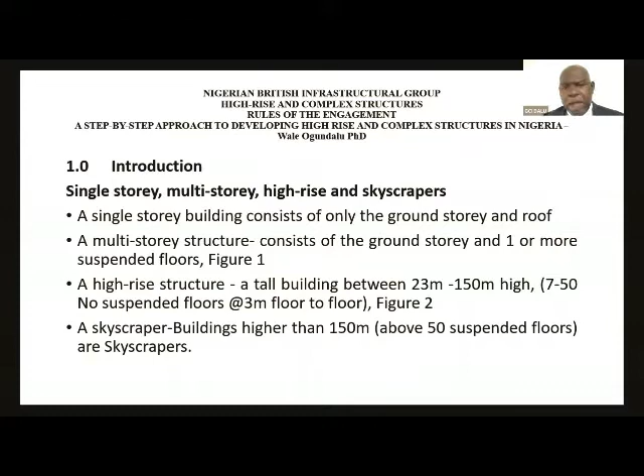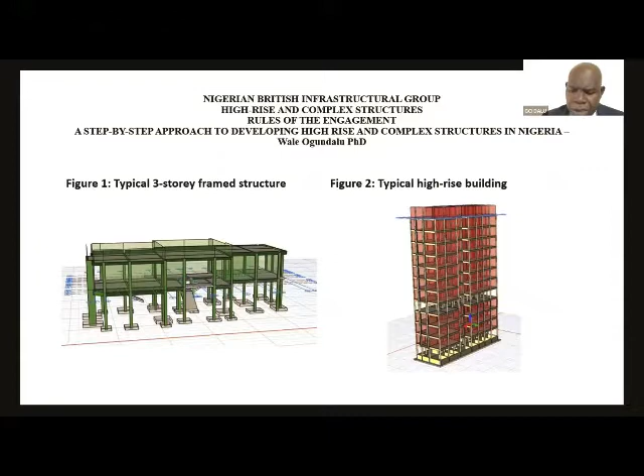A single-story building consists of only the ground floor and the roof. A multi-story structure consists of the ground story and one or more suspended floors. A high-rise structure is a tall building between 23 meters to 150 meters high, usually about 7 to 50 floors, while a skyscraper is a building 150 meters high and above. These are the basic figures for a multi-story building, a high-rise structure, and a skyscraper.

The design of a single-story building and that of a multi-story building, high-rise, and skyscraper follow the same principle. And that basic principle is to get all loads to the foundation, onto the soil, for the soil to take care of it.

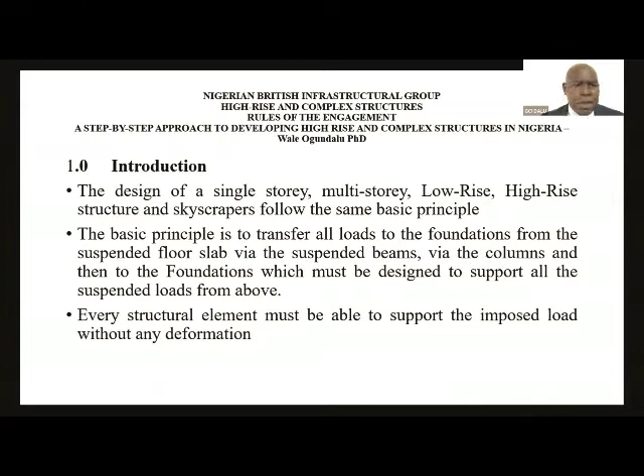A step-by-step property development process: Step 1 is the pre-purchase stage, whereby the developer sources for funds, looks for land, and gets the land. Step 2 is the contract negotiation and land acquisition. At this time, the developer buys the land, either taking it on lease or as an outright purchase.

Step 3 is the town planning and development approval process. Usually this is not followed in Nigeria, but in the UK, you go to the council, get the permit, and then go back and do your drawings.

Step 4 is the working drawing and documentation. Here, you enlist an architect who does the drawings, and you enlist services engineers and other professionals who also do drawings. Step 5 is the tender period, in which you enlist a project manager or quantity surveyor who does the quantities for you, prepares the bill of quantities, and then you invite contractors to make the building.

Then comes the approval stage. Step 6 is the construction, whereby you hand over the site to the contractor, and he does the construction. Step 7 is when the contractor finishes his job and hands over the keys to you. Then you, the developer, decide whether you want to sell or make a quick profit.

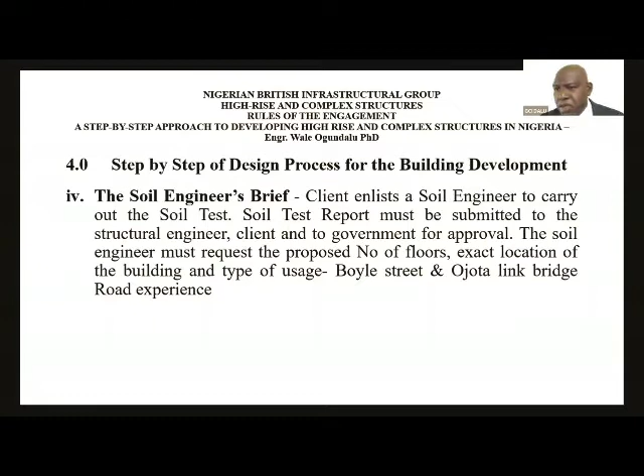The main things to look at in the soil test report are the allowable bearing pressure and the soil profile. Then the structural engineer completes his design, including the foundation and the superstructure, and hands over the drawings to the developer, who will now go ahead and process the approval.

Similarly, the developer also engages all the service engineers—M&E, fire, and others—and they do all their drawings. It is better to verify professionals' licensure before commissioning them. This is to eliminate the use of quacks.

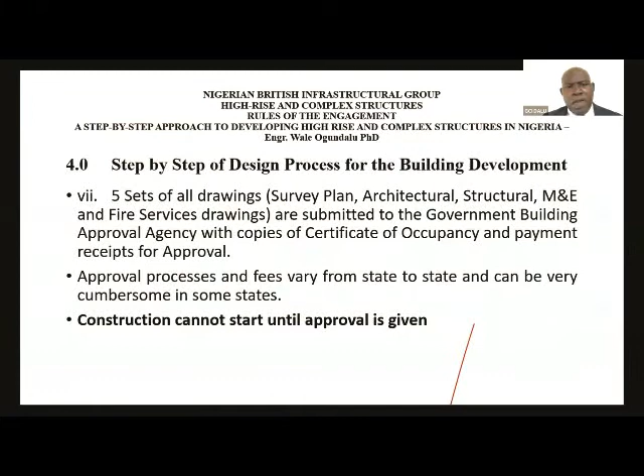5 sets of drawings are required for town planning approval and processing. While doing this, the client can enlist a quantity surveyor who does the bill of quantities. Based on the client's advice, you decide on an open bid or closed bid. Open bid: you advertise and contractors tender. Closed bid: you find about 7 people you've worked with before, invite them to submit bids, then select the best and proceed with appointment of the contractor.

The consultants are required from the start of construction to the end of construction. You jeopardize your investment and property when you refuse to engage professionals in site supervision.

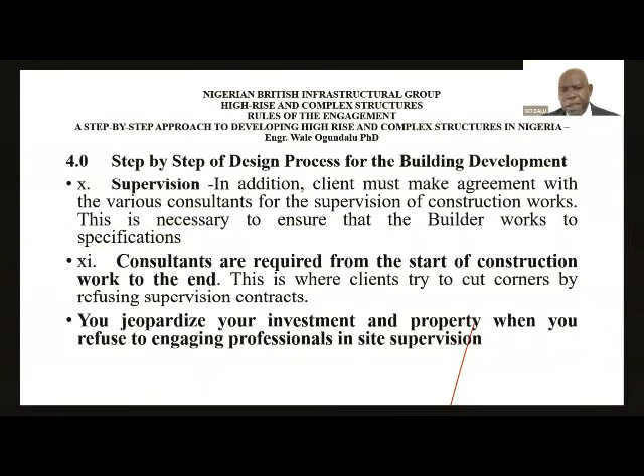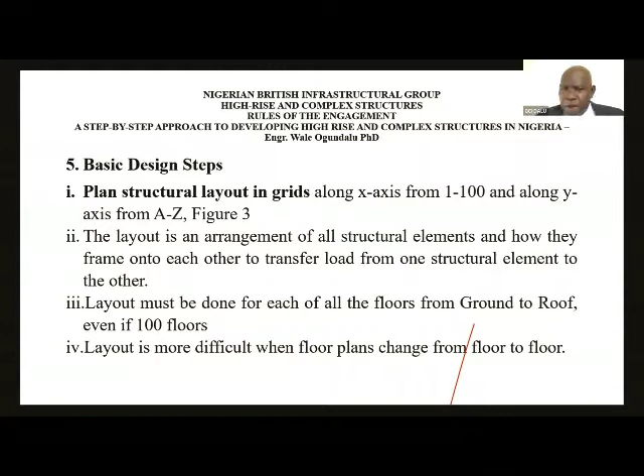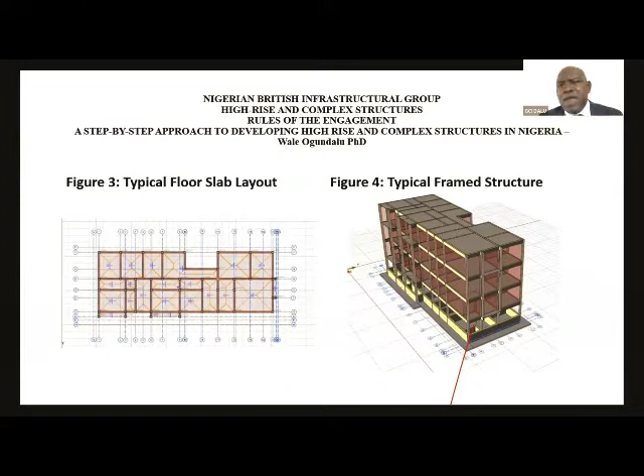Basic design steps: you plan the structural layout, which shows the arrangement of all structural elements - the floor slab, the beams, the columns, and the foundation. The floor slabs are horizontal, like a table top, and under it you have the beams. The load goes from the slab to the beams, from the beams into the vertical columns, and the columns take it down to the foundation. It is always important to make sure your layout and columns are straight. You do layout for each floor - whether going to 100 floors, you must do the layout from floor 1 to 100 and to the roof. Figure 3 is a typical floor slab layout, and figure 4 is a typical frame structure.

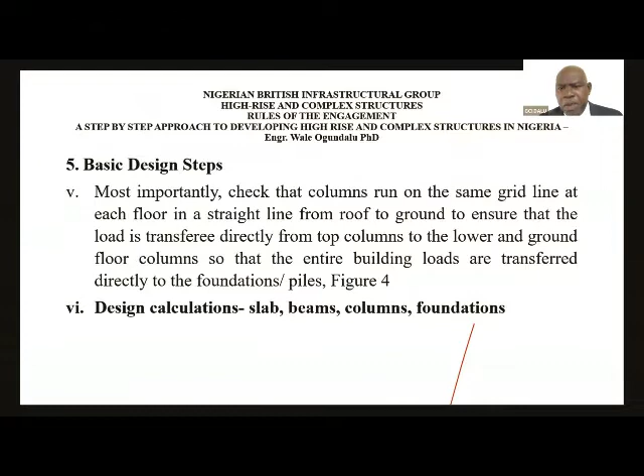Design calculations: you design the slab, you design the beam, you design the column and the foundations.

Basic design steps for high-rise buildings: in the design of high-rise buildings, you must check the stability of the structure under wind load in the north-south direction and in the east-west direction. You must obtain the wind load and distribute this onto the structural elements resisting the wind - most of the time we use shear walls, otherwise you can use your columns, distributing it to all of them. You also need to check shear walls for any uplift, and if there is uplift, you find a way of anchoring such onto the supporting pile foundations.

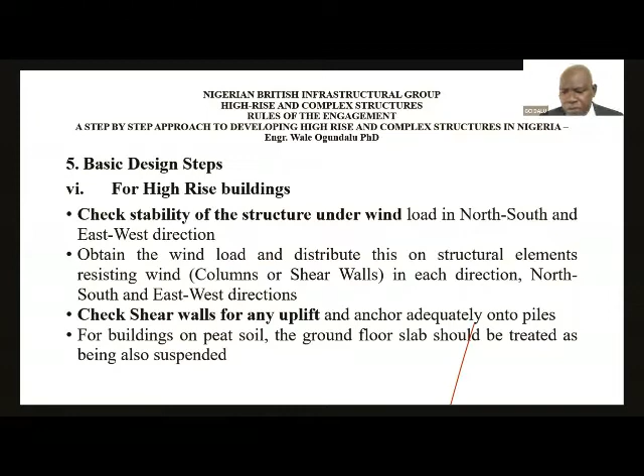Basic signs of distress in a building: you have horizontal wall cracks, vertical wall cracks, deflection, and settlement or tilting. The moment you see a wall crack, go on one side and look at it, then move to the other side and look at it. If that crack appears on both sides of the wall around the same position, then you have a structural crack. When you have vertical cracks, it has to do with the foundations, and then you continue.

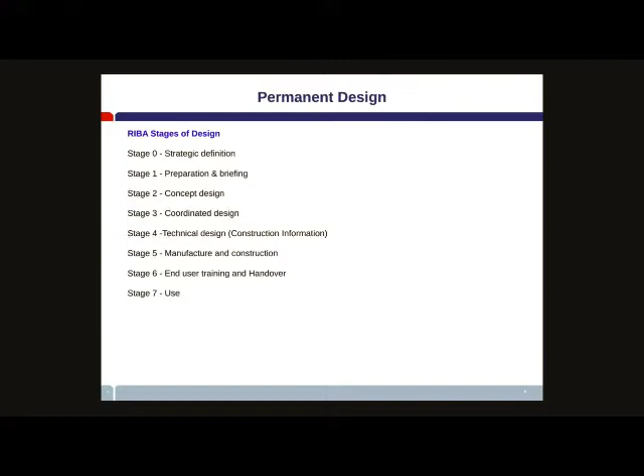Temporary works design - the design solution is used to support the permanent work. So while the concrete is still not up to strength, you need to put in some temporary works to temporarily support it till the concrete slab and beams gain 28-day strength. Or we use it to support trenches while excavating for drainage, or temporary works as the foundation for a tower crane, and also sometimes access scaffold, and you can put in some fans as well to protect people walking below, including the public.

You have to actually put in some props. So you have the false work right at the top, which supports the slab that you're going to cast. Below that, you need to have another 2 levels of props, just to make sure, because the slabs below might not be able to take all that load, since the loads haven't been transferred into the columns yet. So you temporarily do that, and you crush your cubes till the slab above reaches the required strength, and you can remove some of the props.

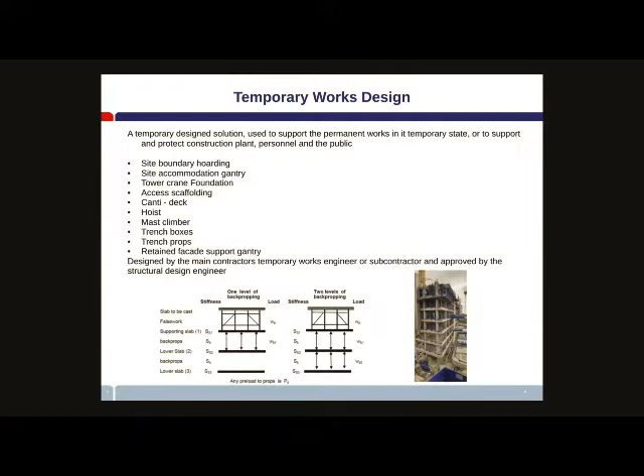Approvals. The consulting engineer does the design, and then another in-house engineer does an independent check on his design. Then you submit to building control. They do the checks and approve before we start on site. The client's technical advisor would also do his own checks and approve.

There are also some subcontractor design elements, like structural steel or cladding, where the subcontractor would develop the design and then submit it for approval again to the structural engineer. So at every stage, everything must be checked and approved before you actually go into manufacturing.

CDM regulation, construction design management regulations. It's a law, an act in the UK where everybody has responsibility, every player. The aim of CDM regulations is to improve health and safety in construction work. It's a legal requirement.

The golden rules of CDM. CDM applies to every construction work in the UK. Even if it's one hour of work, you must apply CDM.

Anyone appointed to work on a construction project must have the skills, knowledge, and experience to carry out their role. Each duty holder has his own duties that he must carry out under CDM.

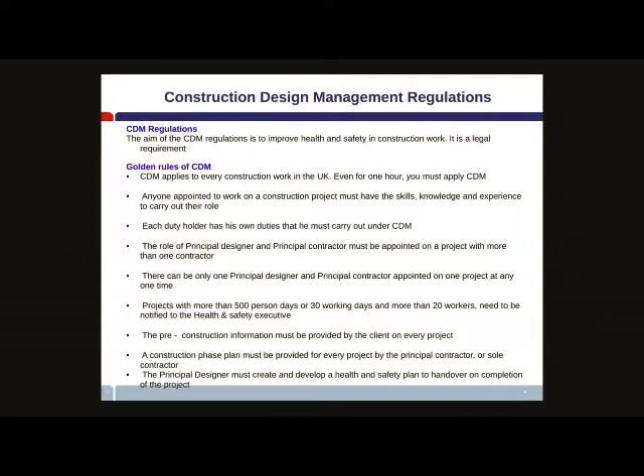There's one bullet point I missed - the client also has responsibilities under CDM. So everybody has responsibilities. Nobody can say 'I blame you for that.' You have your own responsibility legally.

Quality control. There's some basic but very important quality control procedures. Before you even start constructing, you need to produce what we call inspection and test plans. You produce that by going through the structural engineer's specification and listing out anything that needs to be approved.

For example, the pour layout of the plan, where your construction joints are going to be. It'll tell you how many cubes you're supposed to test, slump, and it will tell you the layout of your formwork. It's like a checklist that you give to the engineer, and he can use that for his checks.

So basic checks before the concrete is cast: check the formwork, check the false work. False work is what supports the formwork, which is the plywood that contains the concrete.

Check the reinforcement, that it's according to the reinforcement drawing. Check cover, that is the gap between the reinforcement and the formwork, so the concrete is surrounded properly and it performs as required. Check for cleanliness - if you have mud in the concrete, it won't perform as it's supposed to.

Once you've done all your checks, the site engineer would sign an inspection sheet showing exactly what checks were done and what remedial works have been done before the concrete is poured.

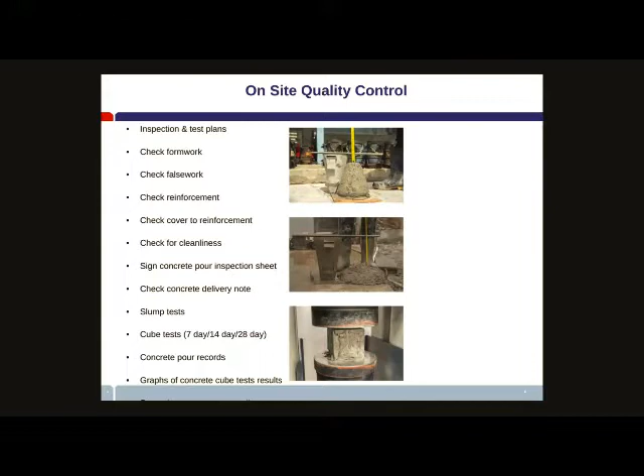Move on to the next slide. Project management tools—this is some of the tools that we use.

Planning software, Gantt chart for planning and monitoring time. Contract program, town planning conditions tracker, because when you get planning consent, there are conditions you have to meet before you start on site, and also conditions you have to meet while you're constructing, and some pre-occupation conditions. There could be hundreds, so you need a tracker to monitor them. We have a risk register where you identify risks and agree on mitigation to minimize them.

Information required schedule—this schedule we give to the design team just to tell them when we need their design. Request for information is when there's a query on the drawing or something not right; we have a schedule for sending that to the design team. Inspection and test plan, I've talked about.

Design program, procurement program. Every month we submit a client's progress report before we meet the client—we have a meeting with the client every month. Target program, logistics plan—a logistics plan covers the movement of materials and plant, so there's vertical movement. We use tower cranes for vertical lifting of materials, and also the hoist for moving materials and men up and down the building.

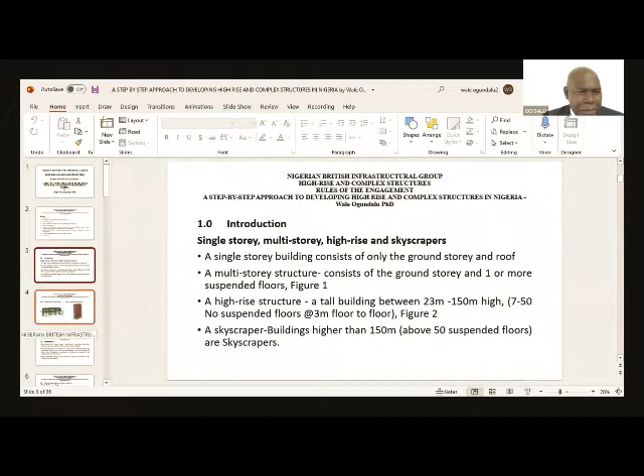I was on slide 5, which has to do with the introduction, and I was mentioning that the design of a single-story building, a multi-story building, and a high-rise or skyscraper follows the same principle, and that is to transfer the load from the superstructure to the foundation—all vertical loads, all horizontal loads in the structure—to transfer it to the foundation, and the foundation to be built without any unnecessary stress.

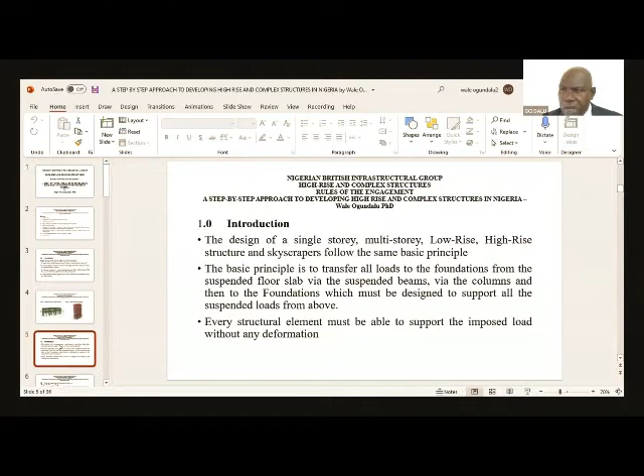There are 7 basic steps to the property development process. Step 1 is the pre-purchase stage, whereby you go ahead and source for funds, source for the land, and decide on what to do. The second step is the contract negotiation—you negotiate for the price of the land and buy it, or you might decide to take it on a lease and negotiate the terms of the lease.

Then step 3 is the town planning and development approval process. Usually in the UK, you might have to go to the council first to obtain approval for the proposed development before doing the drawings and all those things. Here in Nigeria, it may not be necessary. So the next thing is you do your working drawings, which is step 4, and then you go and submit for approval.

Step 5 is the construction, in which you negotiate with the builders and select a contractor, and then you hand over the site to him in step 6 for construction. He does all his work under supervision, and when he completes his work, step 7 is the completion—he hands over the keys to you. Then you decide whether you want to sell or lease the building, whether you want to make quick money or make money over a longer time.

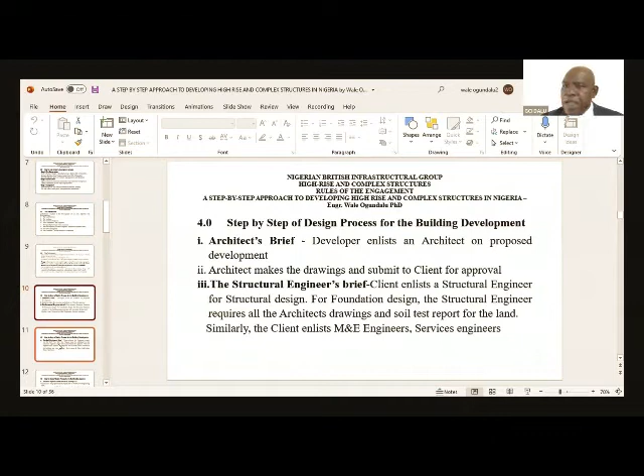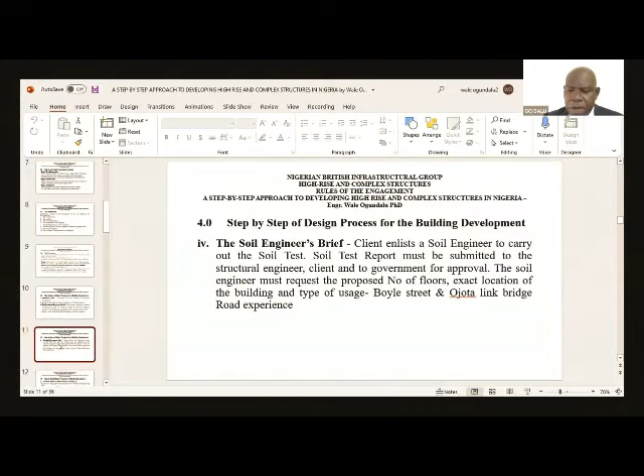In order to complete his job, the structural engineer needs the soil test report. You must do soil test report for every site you are building on. And under every building, you must do a soil test. And then the geotechnical engineer writes the report and sends it to you. You are interested as an engineer in the soil profile under the building and on the allowable bearing capacity of the soil. After the structural engineer completes his job, he gives the drawings to the client.

The client also enlists services engineer, M&E, and the rest, and all of them do their calculations and drawings and hand them over to the client. The client then enlists a quantity surveyor who does the bill of quantities, and then they can invite bids. The bid can be open or closed. Open, you advertise to the general public and they submit. Closed one, you select some contractors and then they make their bids. And then you select the best 3 and then you invite them for further negotiations. After that, once everything is done, they move to site and they start the work.

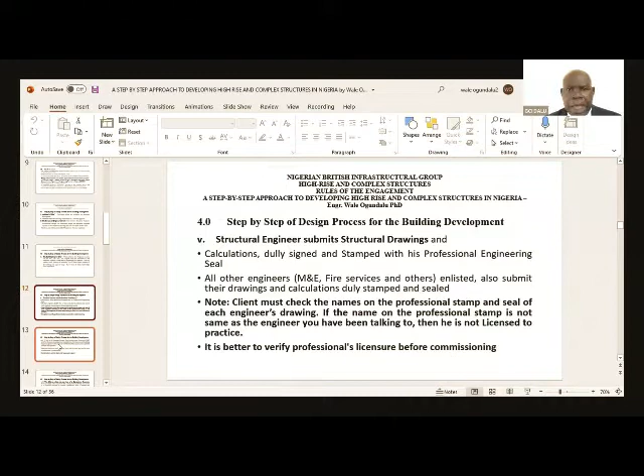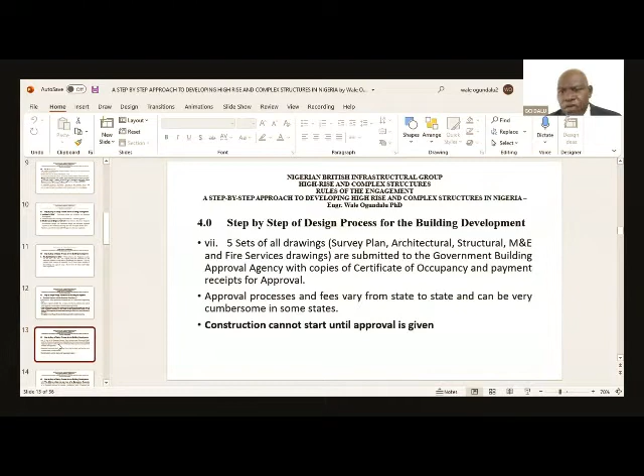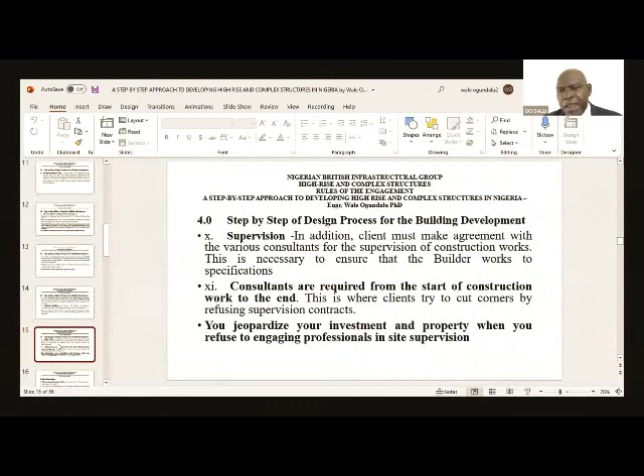It is best to verify professionals and then make sure that you also have an agreement for resident supervision. Construction cannot start until approval is given. Select your builders. Then consultants are required from the start of the construction to the end of the construction work. You jeopardize your investment and property when you refuse to engage professionals in site supervision.

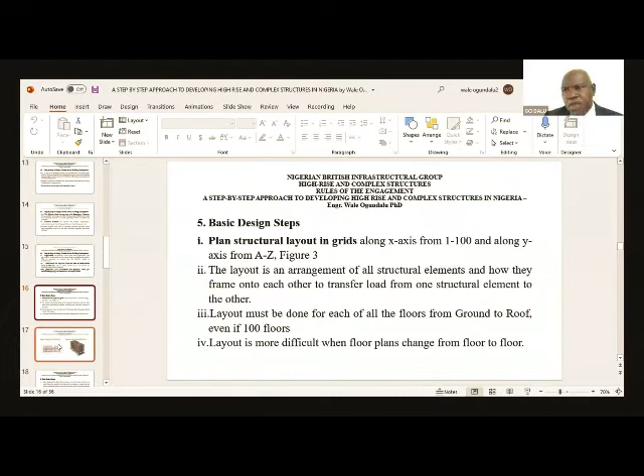Basic design steps. For the structural engineer, the first thing is to do your structural layout. That is the general arrangement of the floor plan. You arrange the slab to be supported on the beams. You arrange the beams to be supported on the columns. And the columns, you try as much as possible for them to be vertical and to transmit the load directly from the upper floors to the foundation. When your columns are not straight, you have more headaches.

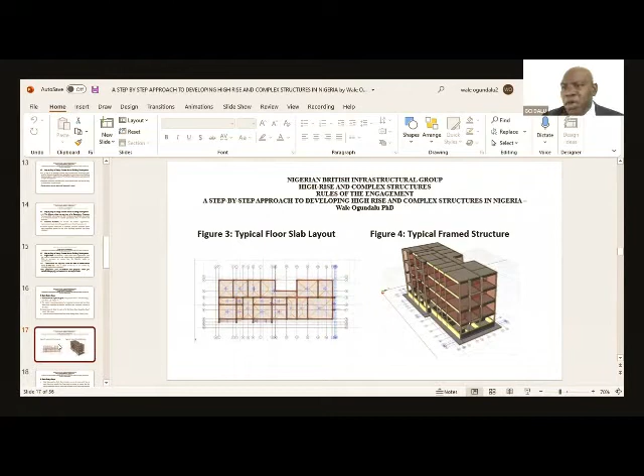This is a basic typical floor plan, and you can see a typical frame structure. You can see the columns, they are straight and they go down. Most of the time when you are doing your design, you start from the roof and then you go down. I, as a person, I make sure that I arrange my frames in grids. And each column, I can identify them from the grids. I can call them column B12. That is the column on grid line B and on the other side on 12.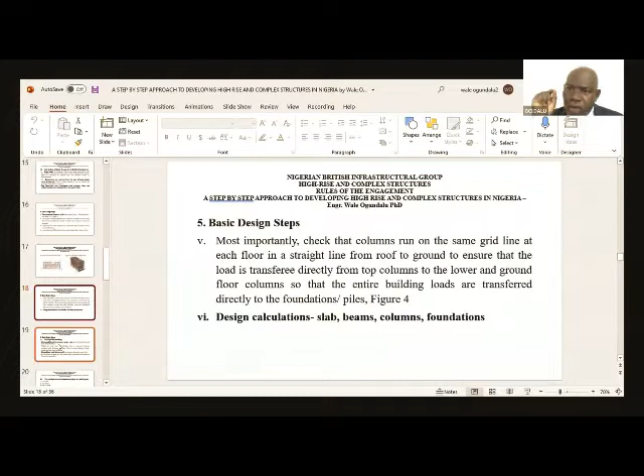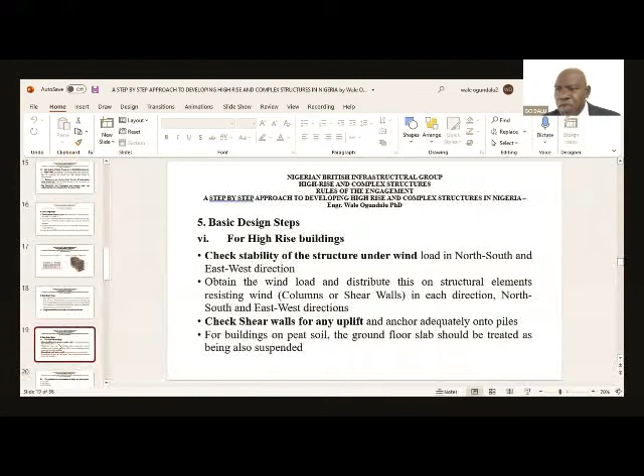Basic design steps, like I said, you design your calculations and you do everything from slab onto beam onto column and floor by floor. For high-rise buildings, you need to check the stability of the structure under wind load. You need to obtain the wind load and distribute it onto the wind-resisting elements. Usually, we use shear walls. But if you don't want to use the shear wall, you can use column and a frame structure. Then you also check that the shear walls, there is no uplift. And if there is uplift, then you find a way to anchor it onto the supporting pile foundation. So these are the principal structural elements that you design.

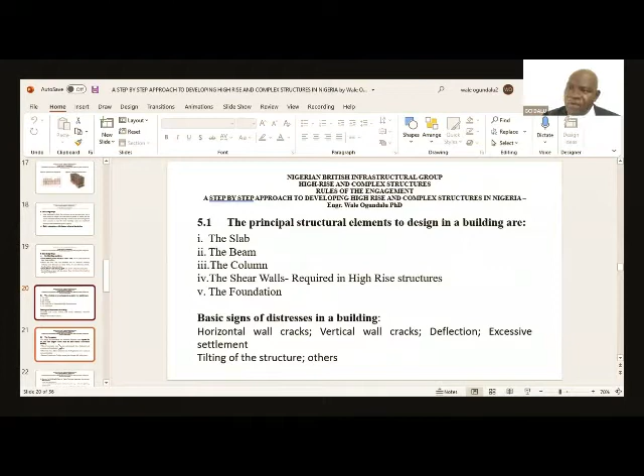And then basic signs of distress in a building, you have cracks, horizontal or vertical. When you have vertical, it's a sign of foundation problem. Then you can also have settlement and you can also have tilting. Tilting is a form of settlement, but differential settlement. And you can have settlement, everything settles down along the same direction. But once you have a settlement of more than 25 mm, then you may be having a foundation problem.

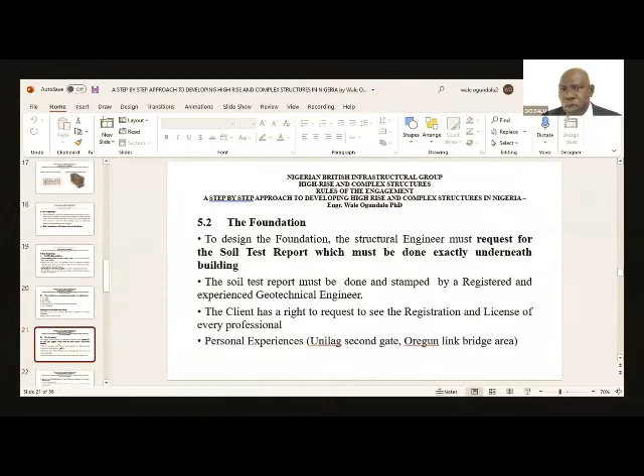Foundation. For every foundation, like I said, you need a soil test report, and the soil test report must be done by a registered professional. There are many quacks in the system, and this is why I'm mentioning all this. When the time comes to share some experiences, we can talk further on that.

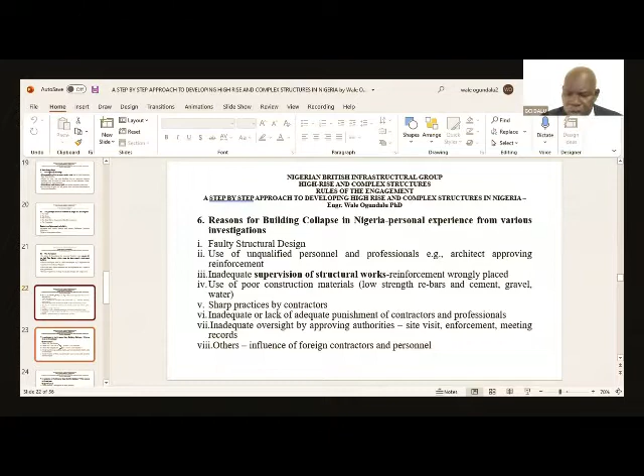Reasons for building collapses in Nigeria. The first one I would say is faulty structural designs. Use of unqualified personnel, inadequate supervision, sharp practices, and then I will also say influence of foreign professionals. When we need to expand on that, I will do that. Investigation of the 21-story building collapse, what I would do as an investigator. I will investigate the substructure.

The first thing I need is the soil test report. The next thing is I need a pile load test. I need a pile integrity test. I also need to check the bearing capacity and the terminal depth of the piles.

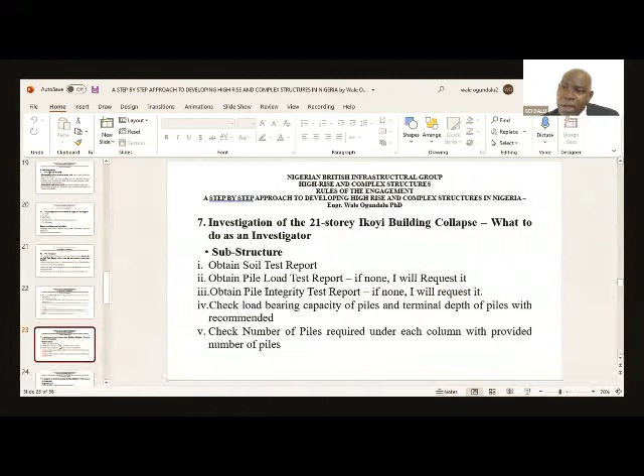These are areas where you have sharp practices. You have somebody, you say, do a piling to 30 meters. He stops the piling at 12 meters. One, you have reduced the pile capacity. Two, if you are unlucky and you have a deep depth of the peat, then you'll be putting your building on inadequate soil.

The superstructure, I will check the columns, I will check all the structural, I will obtain the structural drawings, I will obtain the structural calculations, and I will check every structural element, especially the columns. The collapse is a total collapse. It is not partial, and that is what makes it more serious and a very serious impact.

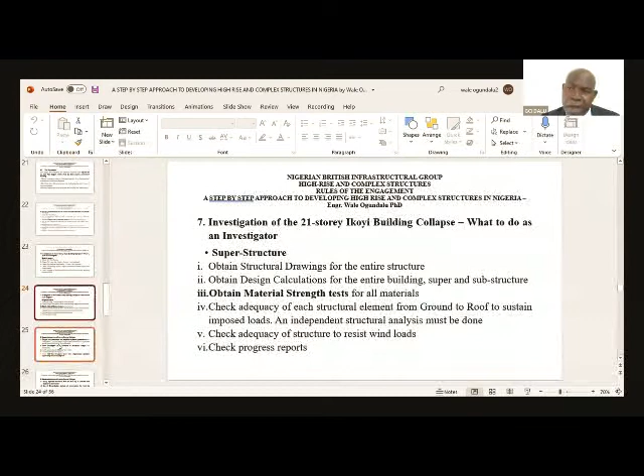Engage only competent and capable registered professionals. Teach developers basic elements of structural design. Every high-rise structure must have an experienced resident supervising structural engineer. Every high-rise structure must be built by a certified registered contractor. Use of direct labor method of construction for high-rise buildings must be banned.

Every building is a responsibility of the Nigerian engineer, because when a building collapses, it is a reflection of the Nigerian engineer. So as we go along in our daily path, look at structures. And if you see any that may have a problem, call the government agency. So the building contractor must always have qualified engineers on site.

For the geotechnical soil test report, like I said, because everything you are building depends on the ability of the soil to sustain those imposed loads, the soil test report must be done by a registered professional. And you must check that you are not using a quack.

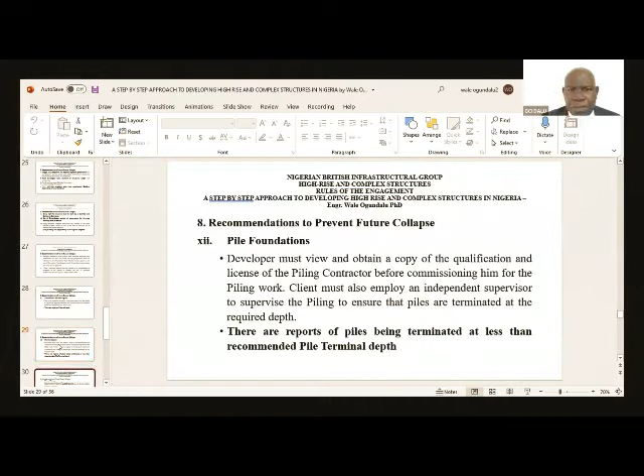Material testing. Institution-based material testing laboratories like University of Lagos, Yaba College of Technology should be used in advisory capacity and to assist in material testing. As far back as 1990, as the staff of Ove Arup and Partners, all our contractors were referred to University of Lagos for material testing. And I can say there was little or no building collapses then.

Say no to vertical extension. Once a foundation has been built and you now go and raise the structure, you are adding load which has not been accounted for in the foundation design. I can share one or two experiences later, but if you know you want to go for 20 floors, you can design your structure and the foundation for 20 floors, and then build it to 10 floors if you don't have money. And then you continue later when you have money. So right from the beginning, design your building and the foundation to carry the number of floors you want.

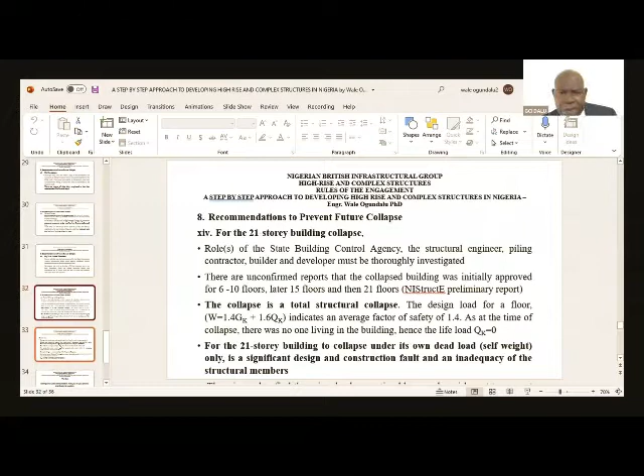For the 21-story building, there are some other recommendations. But because of time, let me just run to my conclusions. Engage only competent and capable registered professionals on your project. Clients can request a copy of the professional's documents. And if the name on that document is not the person you have been talking to, just know straight that is a quack.

Consultants are required from the start of a project to the end of the project. You jeopardize your investment and property when you refuse to engage professionals in supervision. Every building is a responsibility of the Nigerian engineer. Institution-based material testing laboratories are highly recommended. Say no to vertical extension.

Thank you. Have a nice day, sir. Thank you very much, Engineer Ogundalu. Thank you for that really powerful insight that you've shared. I do look forward to the questions. I have some questions written down, but we'll come back to that towards the end. But I want to bring up the next speaker.

The next speaker is Mrs. Udo Okonjo. Mrs. Udo Okonjo is an international lawyer and astute real estate entrepreneur who is currently the Chief Executive Officer and Vice Chairman of Fine and Country West Africa. She also serves as an independent director and chair of the Governance and Remuneration Committee on the board of CAP PLC, a subsidiary of UACN PLC, one of Nigeria's oldest and largest publicly listed conglomerates. Mrs. Okonjo is a seasoned legal practitioner who was admitted to the Nigerian Bar Association and New York Bar in 1991 and 1994, respectively.

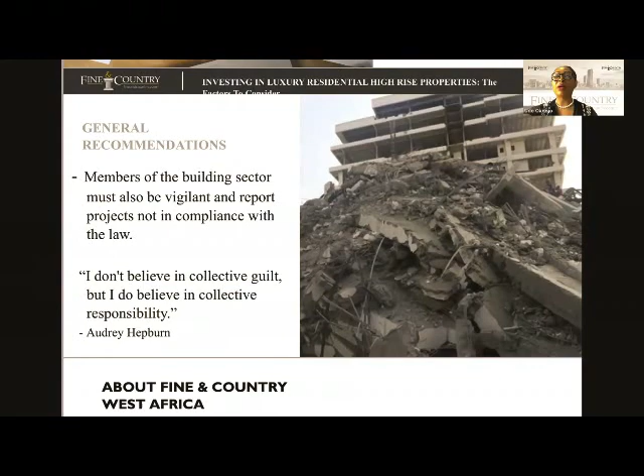Mrs. Udo Okonjo, you have done that topic great justice. Thank you for giving us the buyer's perspective and making sure that we as buyers are also part of those stakeholders and we have the right information.